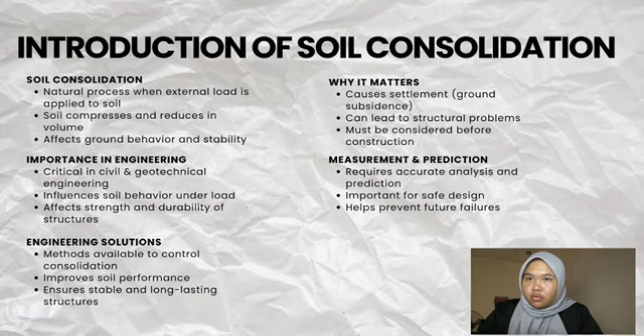The principle of soil consolidation is based on the effective stress concept introduced by Karl Terzaghi. In soil mechanics, the total stress in a soil mass is divided into two components, which are effective stress and pore water pressure. This relationship can be expressed using the equation σ = σ' + u. When an external load is applied to saturated soil, the pore water pressure increases initially because the water in the soil voids carries most of the load at the early stage. At this point, there is little immediate compression of the soil structure.

Over time, water gradually drains out from the soil voids. As drainage occurs, the excess pore water pressure decreases progressively. As the pore water pressure reduces, the applied load is transferred from the water to the soil skeleton, increasing the effective stress. This increase in effective stress causes soil particles to move closer together, resulting in a reduction in volume and eventually leading to settlement. Overall, this process occurs gradually over time and is highly dependent on soil permeability, with clay soils experiencing much slower consolidation compared to more permeable soil.

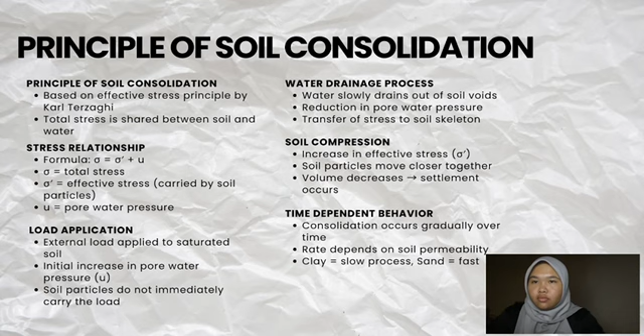The concept of soil consolidation refers to the gradual reduction in soil volume due to the expulsion of water from the soil voids when subjected to an external load. This process is particularly significant in saturated fine-grained soils such as clay, where permeability is low and drainage occurs slowly. Soil consolidation is generally divided into two main stages. The first stage is known as primary consolidation, which occurs as the excess pore water pressure is dissipated as water slowly flows out of the soil. This stage is responsible for the major portion of soil settlement.

The second stage is secondary consolidation, also known as creep, which takes place after primary consolidation is completed. During this stage, settlement continues due to the gradual adjustment and rearrangement of soil particles, even though pore water pressure has largely dissipated. Both stages contribute to the total settlement of the soil, which must be considered in geotechnical design to ensure the stability and safety of structures.

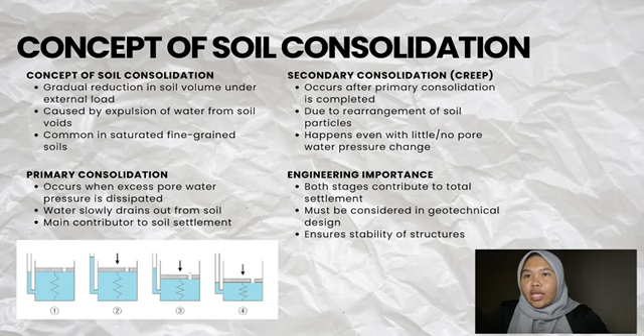In this section, I will explain in detail the construction process and site work method for soil consolidation, which is a ground improvement technique commonly used in soft soil areas to increase soil strength and reduce long-term settlement. To begin with, the first step is site clearing. This process involves removing all vegetation, organic matter, debris, and any unsuitable surface materials from the construction area. The purpose of site clearing is to ensure that the ground surface is clean, uniform, and suitable for further geotechnical works. A properly cleared site also helps in achieving accurate soil investigation results.

The second step is soil investigation. At this stage, various geotechnical tests are carried out, such as borehole drilling, standard penetration tests, or other in situ testing methods. These tests are used to determine the soil profile, shear strength, compressibility, permeability, and groundwater conditions. The collected data is very important because it will be used to design the soil improvement system, including the spacing and depth of vertical drains as well as the required surface load.

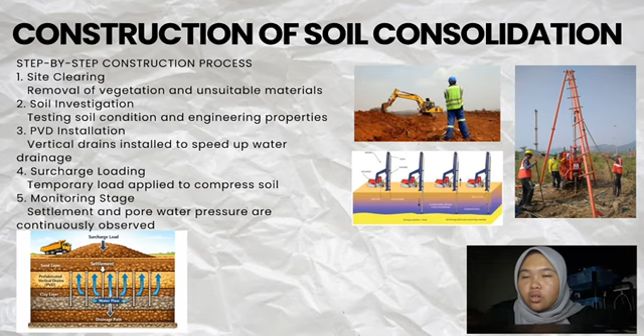Assalamualaikum, my name is Nadamia Arisha binti Muhammad Yusof, and in this section I will explain the key terms in consolidation analysis and also how the calculations work. Consolidation is very important in civil engineering because it helps us predict how soil will settle under a load, which is critical for a safe foundation design.

Number 1, we have volume compressibility. Volume compressibility, or mv, describes how much soil decreases in volume when pressure is applied. It shows the compressibility of soil per unit increase in stress. A high mv means soft clay that compresses a lot, while a low mv means stiff soil like dense sand,

which hardly compresses. To calculate mv, we look at the change in the soil's void ratio from lab tests, compare it with the initial void ratio and relate it to the stress increase applied to the soil. In simple terms, we are asking: for this amount of pressure, how much will the soil shrink?

Number 2, we have coefficient of consolidation. The coefficient of consolidation, which is cv, indicates how fast the consolidation process happens. It depends on the soil's permeability and compressibility and is usually expressed in square meters per year or square meters per second. To find cv, we consider the soil properties, drainage path, and time.

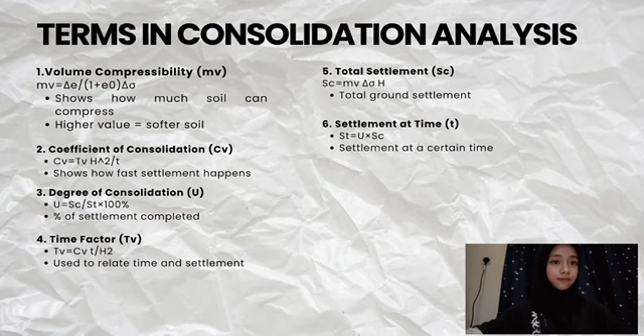I will explain the problems related to consolidation. General definition of soil consolidation: consolidation is the process of reduction of the volume of soil due to the release of water from soil pores when subjected to a load. Okay, the first point is excessive settlement. It occurs when soil experiences a continual reduction in volume. Other than that, it can affect the stability of structures such as buildings and roads.

And point number 2 is differential settlement. It occurs when settlement rates are different in different areas. And then it can cause cracks in foundations, walls and floors, and can lead to structure tilting or failure.

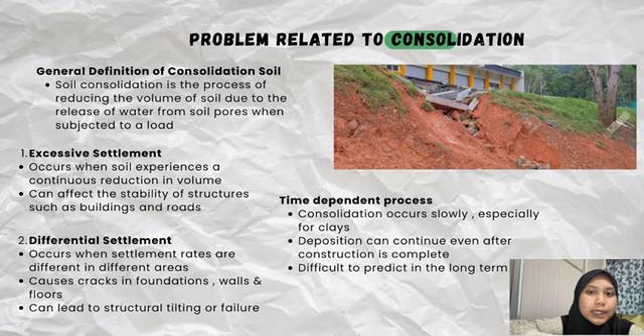So I will continue the problems related to consolidation, which is difficulties in analysis and design, which require accurate soil parameters such as compression index and consolidation coefficient. And then estimation errors can increase repair costs.

Number 2 is reduction in shear strength: during consolidation, the soil may experience a reduction in shear strength, which causes risk of slope or foundation failure. This is critical for soft soils, such as soft clays. And then the risk of structure failure, if not taken into account in design, can cause serious damage and affect user safety and structure durability.

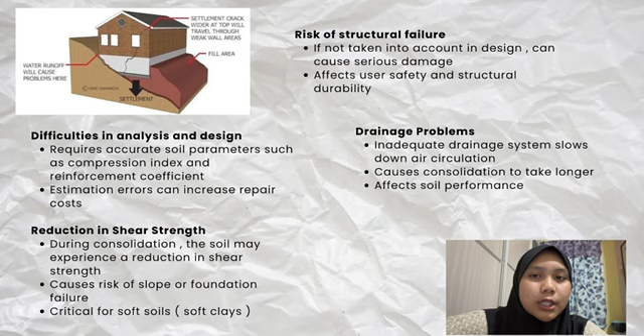And the last one is drainage problems: an inadequate drainage system slows down water flow, causes consolidation to take longer and will affect soil performance.

Okay. In conclusion, soil consolidation is a fundamental concept in geotechnical engineering that significantly influences the behavior and performance of soil under applied loads. It refers to the gradual reduction in soil volume due to the expulsion of pore water from the voids, particularly in fine-grained soils such as clay. This process is highly time-dependent and can continue over an extended period even after the completion of construction.

The effect of consolidation, especially excessive and differential settlement, poses risks to the stability and integrity of engineering structures. If not properly addressed, this issue may lead to structural damage, serviceability problems, and increased maintenance costs. Furthermore, factors such as low permeability, excess pore water pressure, and secondary consolidation further complicate the prediction and control of settlement behavior.